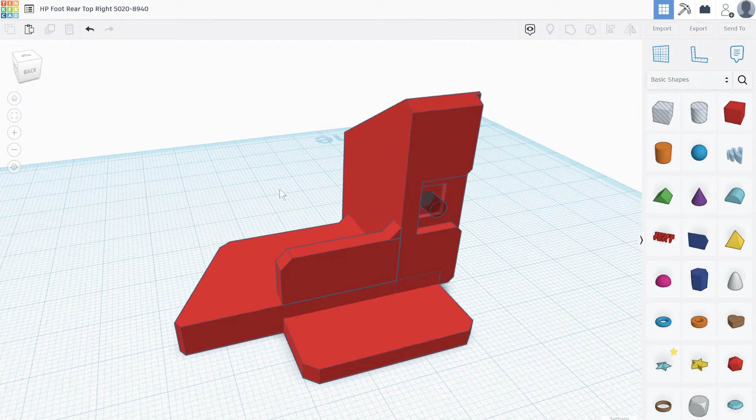We were adding some chamfers, kind of dressing some things up. There's a few more holes. Well, we have to add all the holes and offset still.

Let's see here. We can't change the screw size because that goes into an existing hole. That's fine. And the threaded hole, I need to leave room for adding threads, because the other side might already exist and you may want to use that to thread it in. But if you don't, that's okay.

It looks like there's a pin in here. So what I'm looking at here is this screw holds it onto the piece of equipment. That one has to be the same size because the thing it's screwing into is the same.

This is a threaded hole because the top piece - this thing, let's see if I get the right side - when these two go together, this can screw in. So that's a fixed thing, and I need to make the hole so that those threads can cut their own thread in there.

But this is all you really need, because this is just to keep it from sliding past each other. It doesn't have to be screwed together. That's just a convenience. So I think this will work just fine.

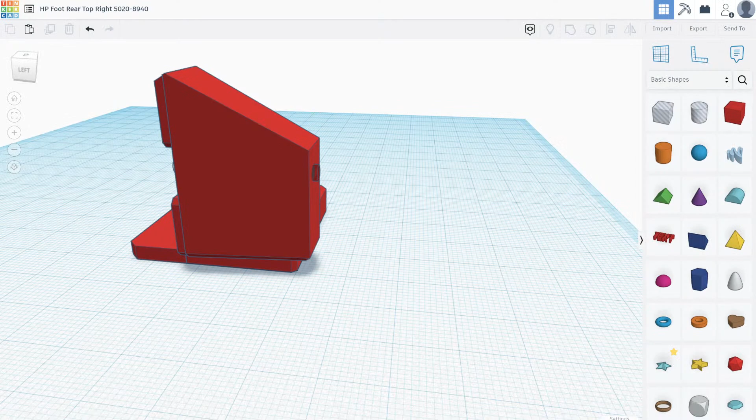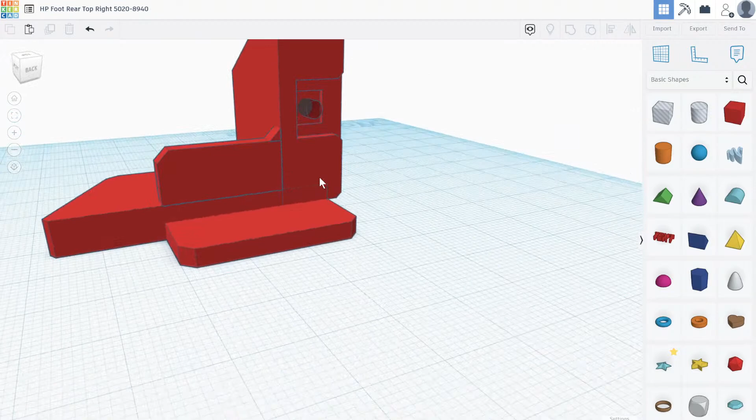Where did we leave off at? There's a couple more decorative chamfers that aren't important because they're small, and the printer will smooth that out. Overall, it looks like we're in good shape.

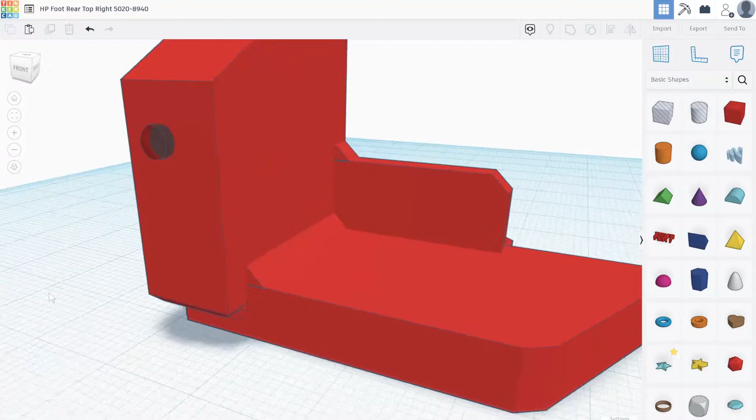This hole needs to go in there. I need to actually put that hole there. Otherwise, does that look the same? How about there's something? Oh.

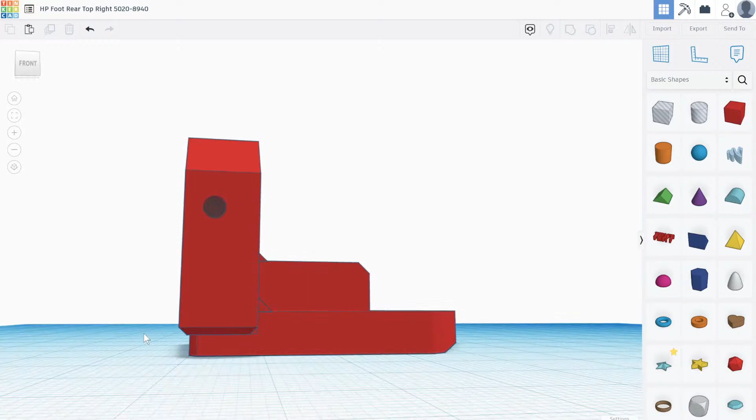That's interesting - 13. No, why is that interesting? That's 10. Why does that look like it's offset more than it should be? I don't know. Anyways, we also have to put a recess here for the screw to go in.

And that hole is centered there. It's about 7, but let's check my screwdriver. So the screwdriver I tend to use is this one, and it's a fairly common size. And it needs 6.5, about 7.

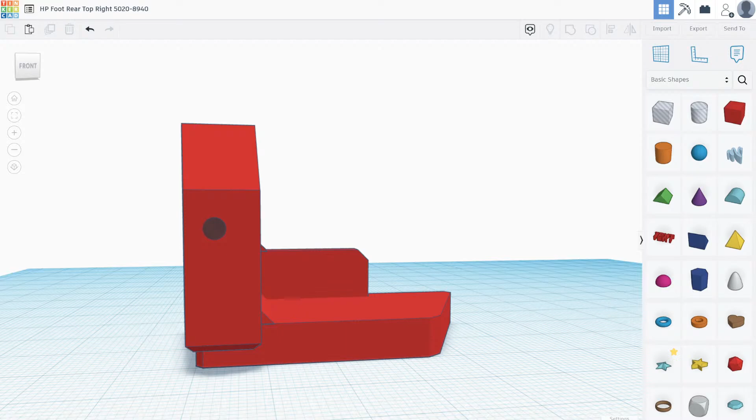So it would definitely fit in a 7, but just barely. If I can get an 8 in there, I will. So let's try with an 8 first and see what happens.

Down - that's looking a bit chunky. Center it up, there we go. Yeah, that would just blow out that edge. At least right there it would.

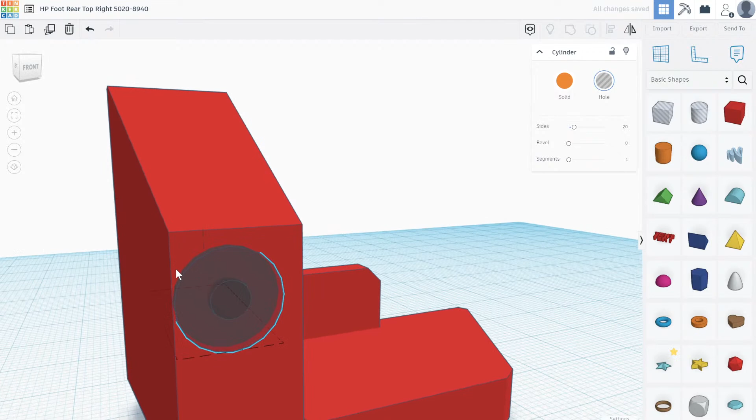So, 7.5 at best. That doesn't look quite right. Yeah, that's centered. I think it's just the angle I'm looking at.

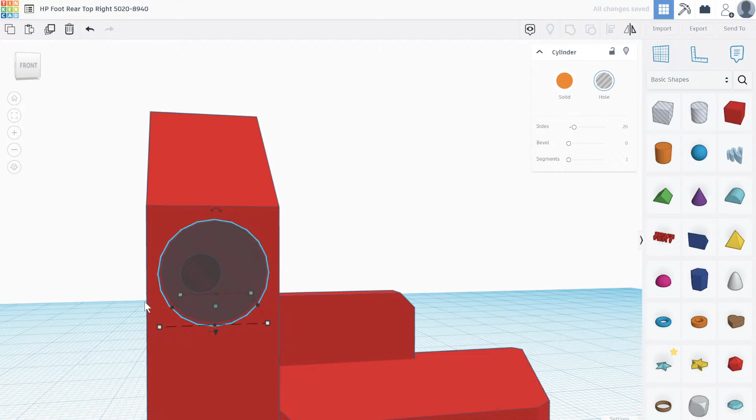What is going on? Ah. Nope. That's centered. Okay, let's shrink this to 7, I guess.

Using the same trick from last time, taking half off each side. I need to make this...

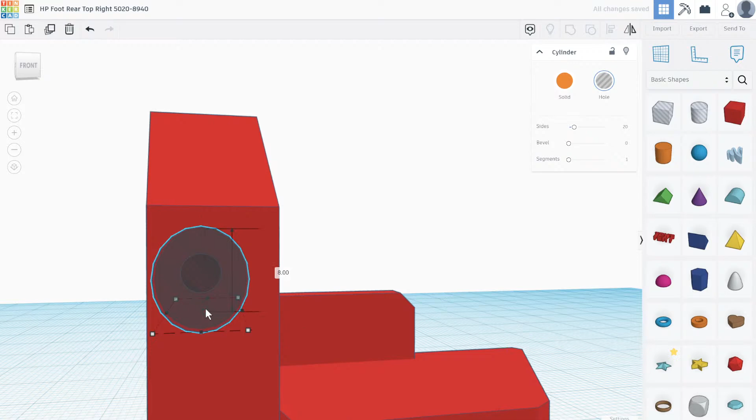Alright, let's make this transparent for a minute to see how deep we're going to go. How deep will we go?

The existing one is a little more than 15. What would we say this was - an M3? Yeah, it seems to be an M3.

Let's see what M3s have got and figure out how deep we need to make that. That is not an M3. Maybe. Yeah, I take it back - that's an M3. But wow, it's really deep too.

That might not be, because this is a US thing. That may not be an M3. It fits really good, but that may be an M3.5 or American size. Yeah, it's not an M3. It's sort of matched. Okay.

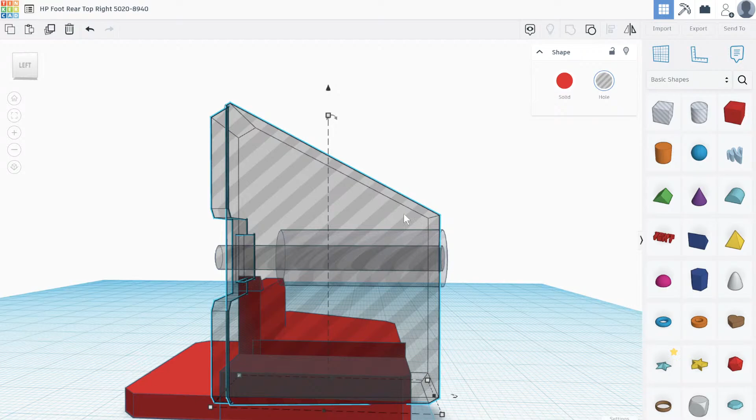Outside diameter needs to be closer to 3.5. Size is 6. It needs to go 8 in, so from the very, very back here, it needs to be 8mm in.

So first, let's bring it all the way to the back edge, and that is 27. It needs to be, because I have one extra one, so it's really 26. Let's put that right there. So that's 26. Now we need 8.

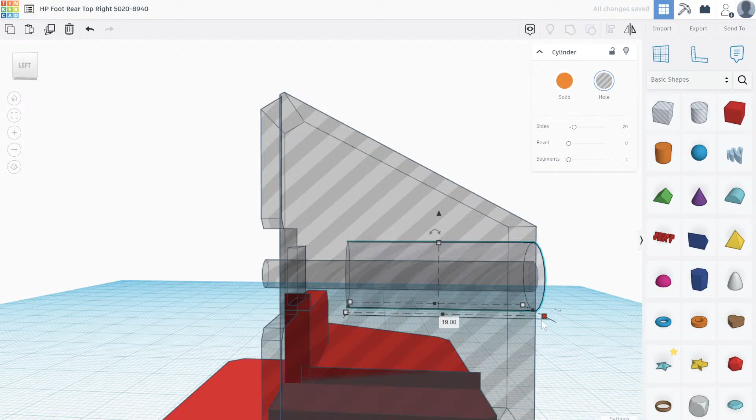So let's take that to 18. And pull that back out one more so we can grab it. Okay, that should do that. That looks decent on that side.

Problem is that this is 3 millimeters. Oops, this. Okay, let's do this again. The problem is that's too short. Okay, there, that is 3 millimeters in diameter. But my screw is 3.5, and that's a problem. That's 3.4.

About 2/10, no, not 2/10, 3.4. Yeah, about 2/10 spacing would be the margin of error in a hole like this for an FDM printer. So I need it to move freely as well, so I put another 2/10 on top of that, which will be just under 4, that's an extra 0.4 millimeter, sorry. And we need it to be 3.4, so it really needs to be 3.8 millimeters.

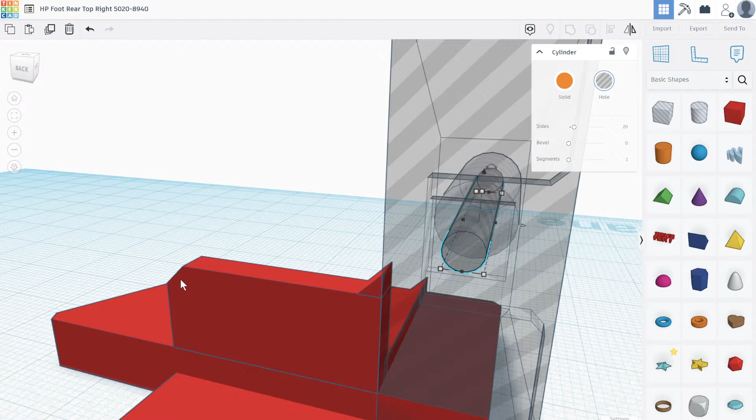And actually we could do that. It's probably cutting it a little close for an FDM printer, but 4 millimeters isn't really that bad. Let's just do 4, it's not going to make any difference. The screw will still fit, even if it's the right size screw, and it's okay if it's a little sloppy. So let's make this 3.5. We're going to add it half to each side.

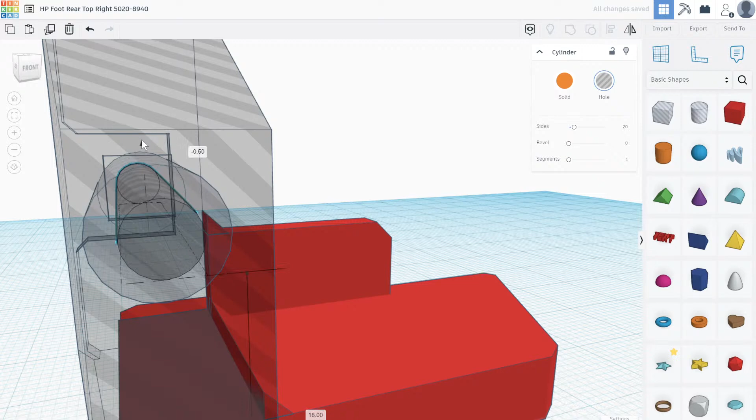Let's make this 4 and drop it down to half. There we go, that's back in the middle. So we've got our through hole, we've got our countersink, and we've got all those. Let's put this back to solid.

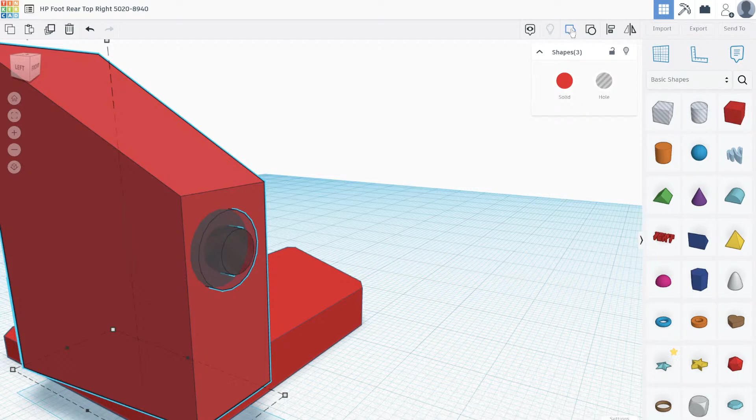Subtract these out. Oops. First this one and this one. Hello hole, there we go. That should take care of that.

Looks good, looks good. Something still, I mean, it's not wrong, but it just looks weird. Like it's not in quite the right place. I don't know what it is. But let me double check a few things because it's worrisome.

7 millimeters from the edge. It's slightly off center at the top, but not that much. Yeah, see, that's 10 before the chamfers. Is this 10? Let's double check.

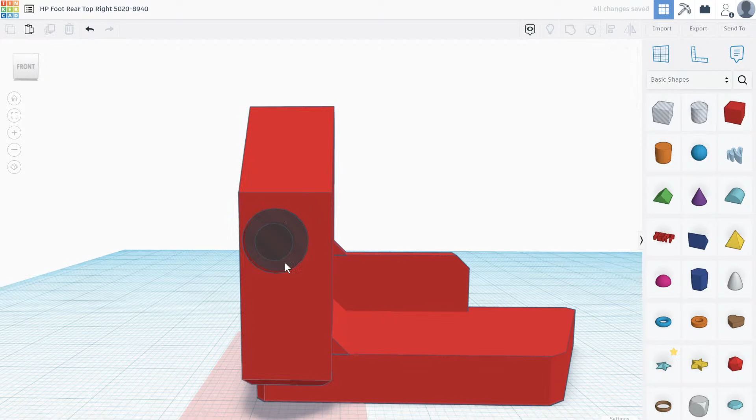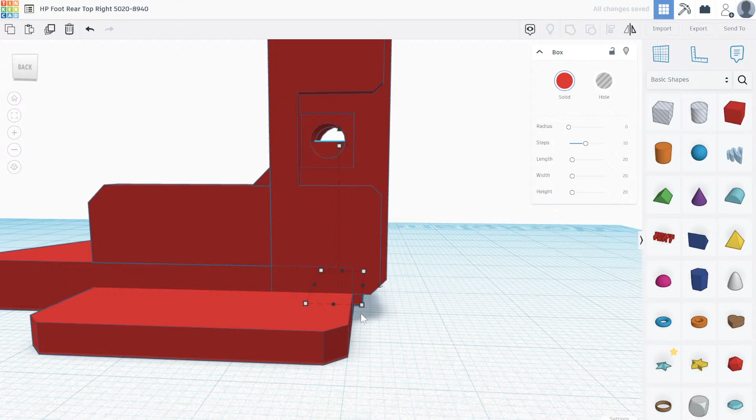Can't check that way, let's use the measuring block. Doink. How big are you? You're 10, exactly. Well, let's make it 7, because that's where the center needs to be. Did I do something dumb? Probably, pretty good at that. And boop, okay, that is.

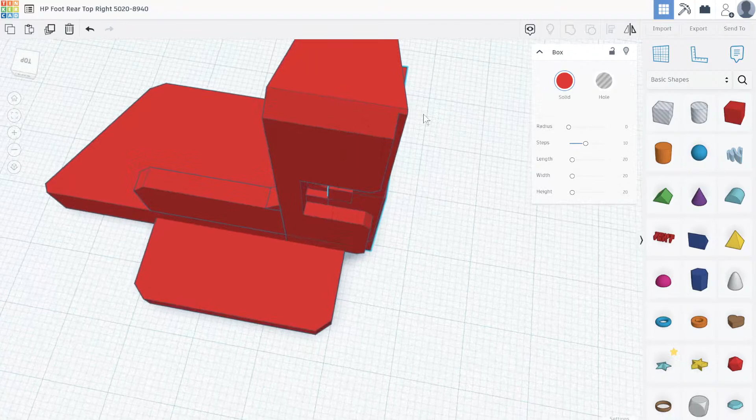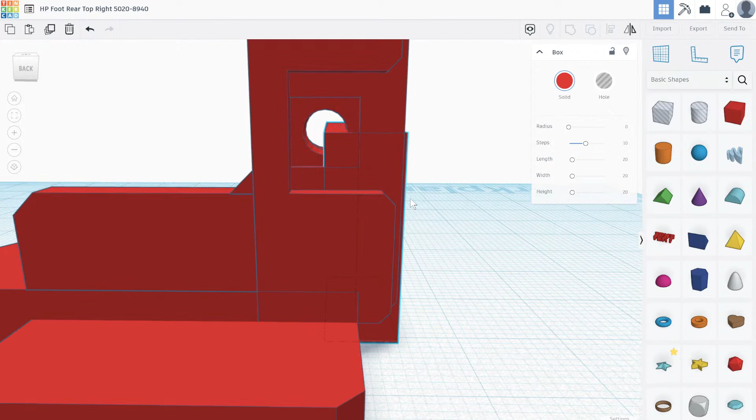That is something. Why is that not... why is that not 10? That's exactly 7. Why is that? Why is that there?

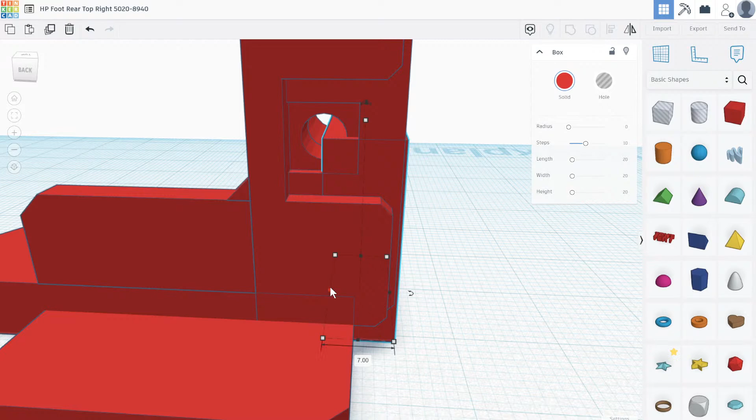That is 13, right where it's supposed to be. Well, let's measure in from this side to see if that's any different. From that side, it should be 6. Is there a bevel on this side that I'm not accounting for?

Maybe. Ooh, is there? Let's get the square out. No. Well, maybe the tiniest amount. It's hard to measure with it being so small. No, there's no bevel on that side.

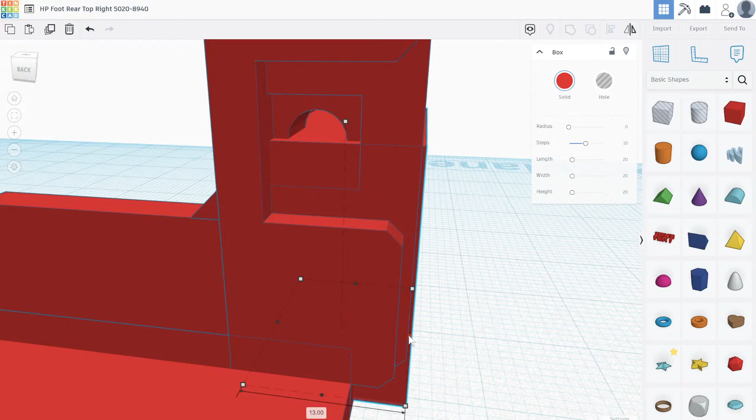And so that pretty much has to be 6 to be right in the middle. Now, that's 6, that's 13, that's 7. It's 1 millimeter off. So what is it about that hole that looks so weird?

Is it just because it's half a millimeter off? Is it because that's rounded, maybe? Let's look from the outside edge. That inner hole is 7.5, and it is 1.8 from the edge.

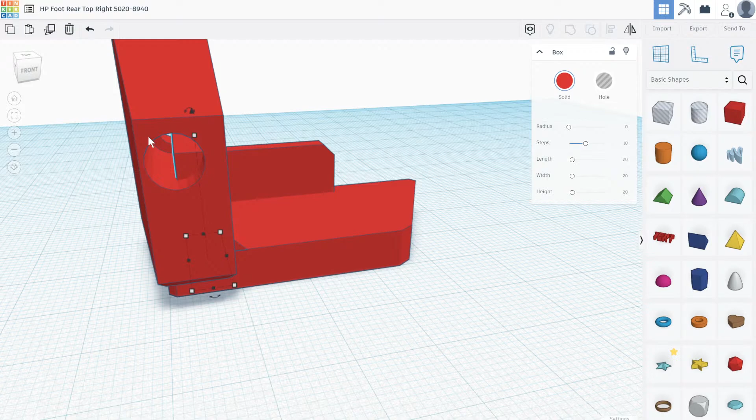Let's look again. Okay, because that is a 7 millimeter hole instead of - I got a 7.5 millimeter hole, and I've got an 8 millimeter hole. A 7.5 is 1.8 millimeters to the edge. Split the difference, 0.25, 1.8 minus 0.25 equals 1.5.

And that's why it looks weird, because that should only be 1.5 millimeters, and it is more like, well, yeah, at least 2.5. That's 1 millimeter off.

There's no way that that goes crooked into there. Well, let's measure to the center of both sides off of this flat edge. Let's see what we get.

That hole is centered really close to, wow, a little more than 5 from that side. On the back where the screw comes out, no way, that can't be at an angle. Would they do that? I mean, they kind of have to, maybe?

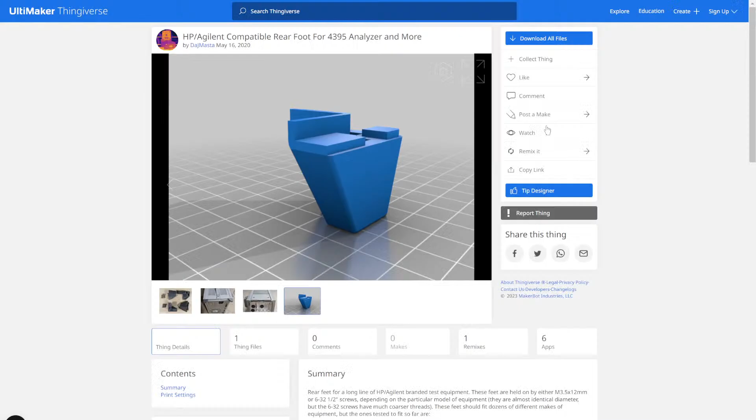Is that hole crooked too? I can't look inside, unfortunately, but I can't get the angles just right. But it appears that it is. Possibly. Yeah, maybe.

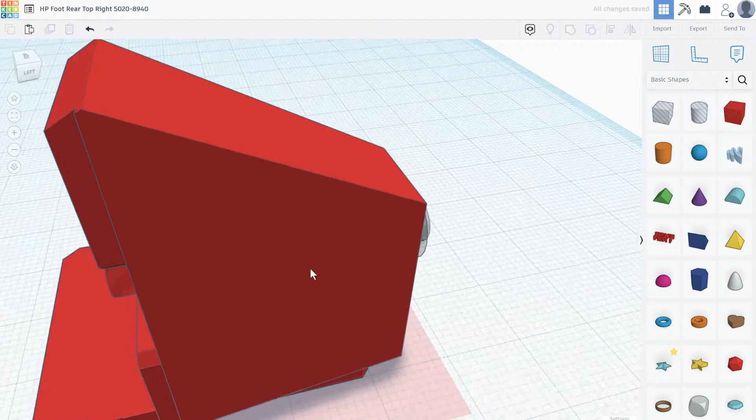All right, well, now we know. That's not so bad, though. It's a little bad because I can't pivot from a single point back here. But I don't really need to, do I? Let me see.

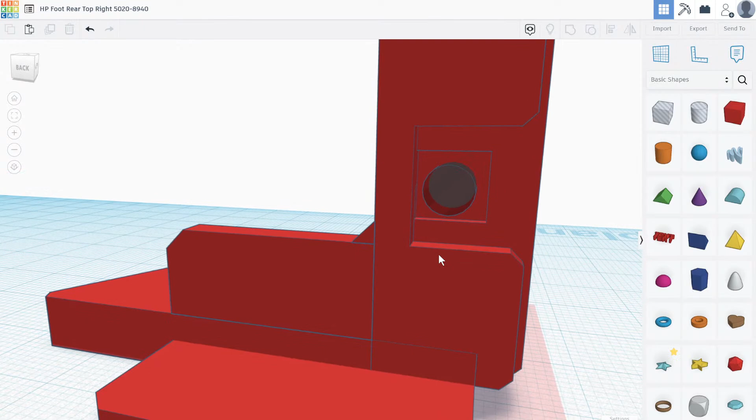I made that hole a little bigger, and my target is to put it right in the center of that box, so I got a little wiggle room. Here I'm gonna do it by hand. Let's see, we'll do a couple degrees to bring it on center.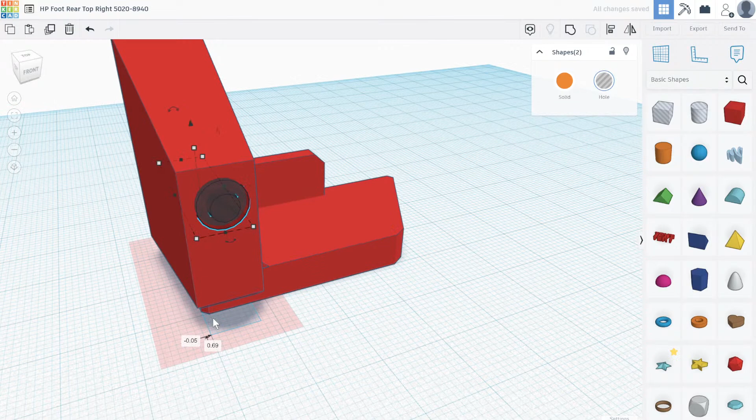Maybe too far. Yeah, that's what I suspected. Just put it back about half that, and then we will slide it over. Maybe not that much. Let's put it at -0.2 just to see how far.

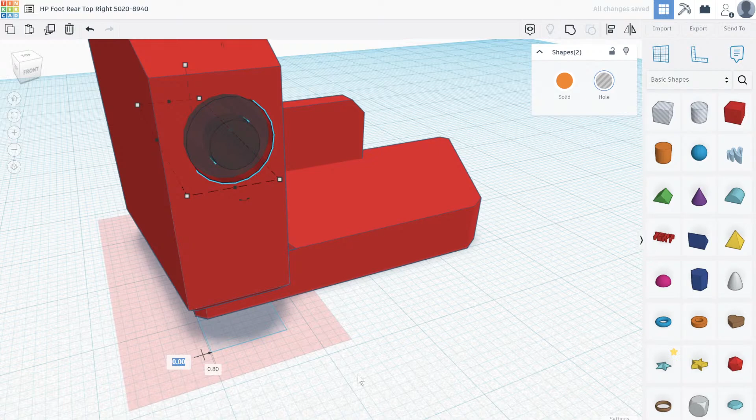Nope, that's not the right one. 0.8. Wow, my number fingers not doing great. Well, that's kind of centered. What's this side look like? No.

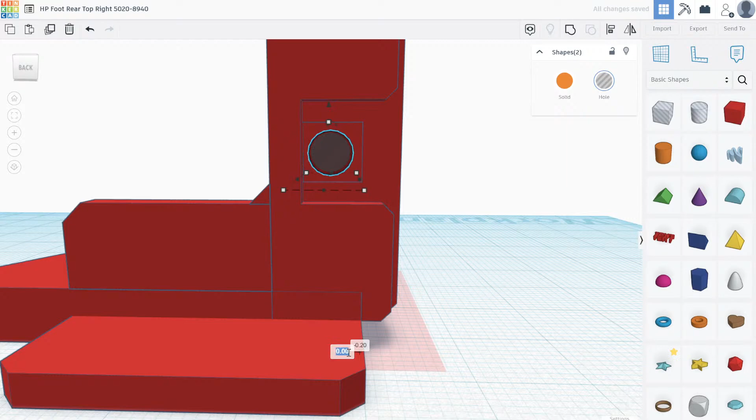-0.1. Yeah. -0.1. -0.2. -0.3. Looks good to me. All right, let's look at the other side. Centered-ish. Okay, that was only like 2 or 3 degrees, but I think that's enough to make that.

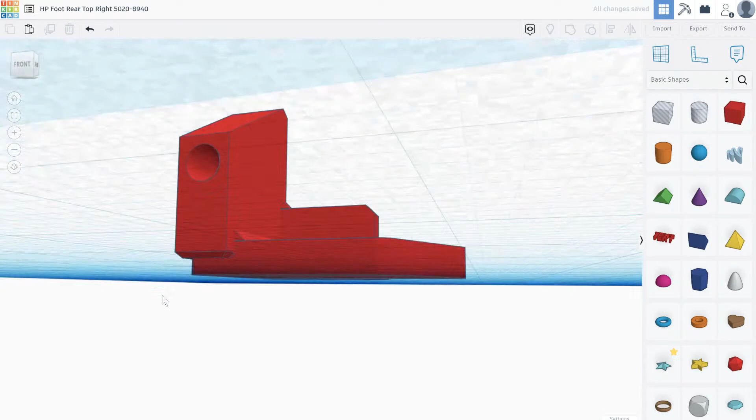Let's get rid of our measurement block now. All right, I'm good with that. Let's get the last couple of features on the bottom here.

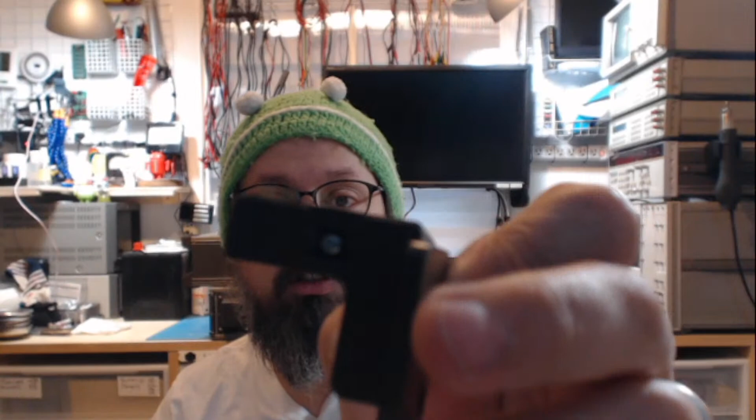So the next part is, we just finished that. The next part's here. I see the problem, my light's off. We need this little hole. Well, we need the threaded hole, and then we need that recessed hole right there. And then we should be able to finish. Okay.

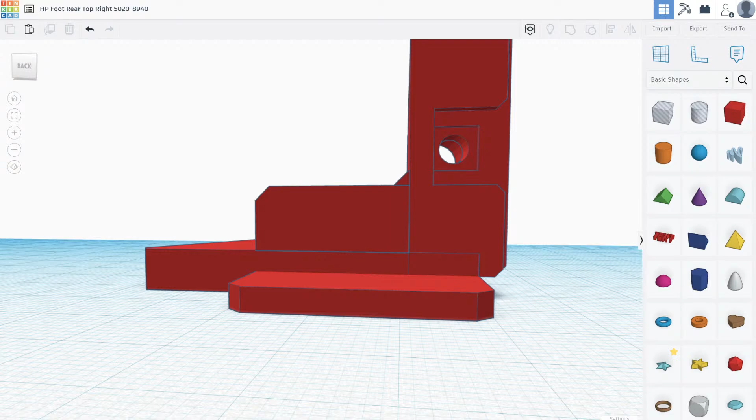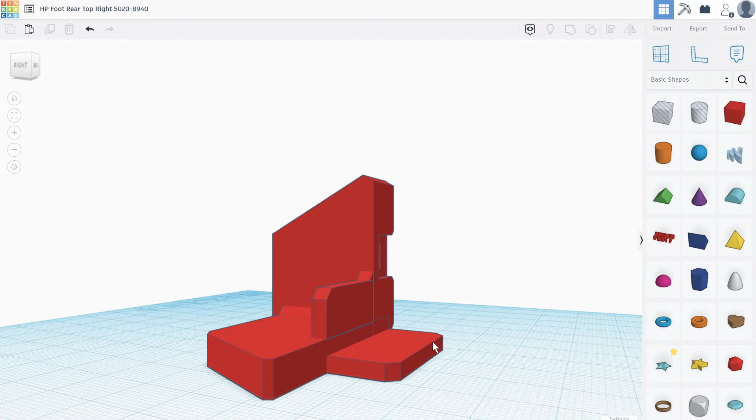And that's kind of important where it is located. Where's the important surface? The important surface is this one, because this is where the corner of the piece of equipment it sits in here, and that's where it screws into. This is the mating surface for the other device that would attach to this. So

we should measure it. The hole here needs to be measured from this surface to the center of this hole, or at least the edge of that hole. Let's look. That hole is 7.5 wide. We can make that 8, I'm sure, without any issues. The pin on the other side is 7.4.

Yeah, let's make it 8. And that needs to be from that surface. I can extend that to here. Looks like it's about 8.5 to the center.

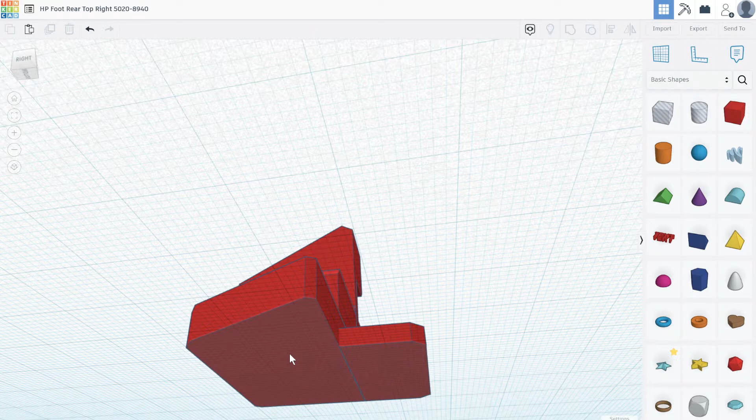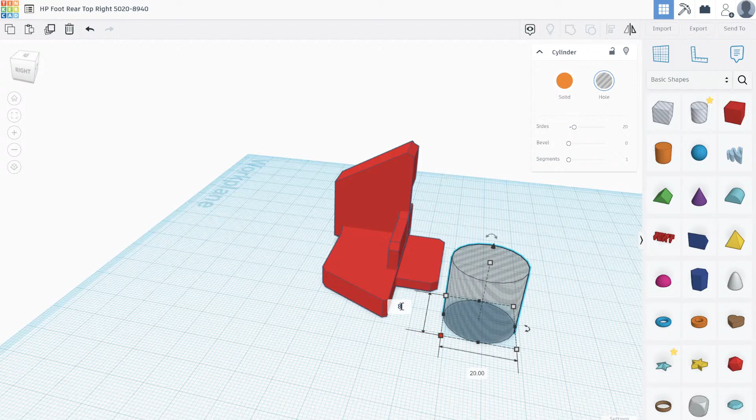Nope, it's 7. Okay, 7 millimeters in to the center, 8 millimeter circle. Yep. Where did that go? Three millimeters deep. There we go.

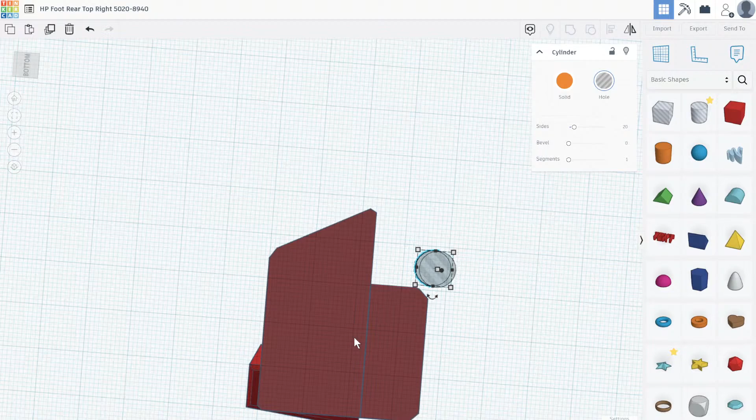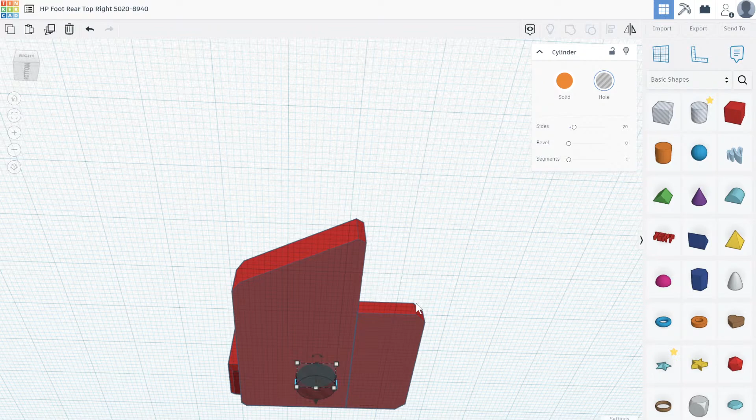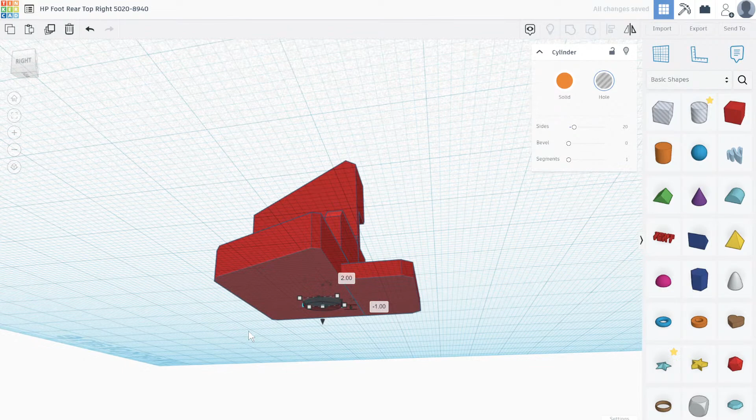And now it's the other way is 15 millimeters from the back edge. Okay. Right there. And yeah, it looks right.

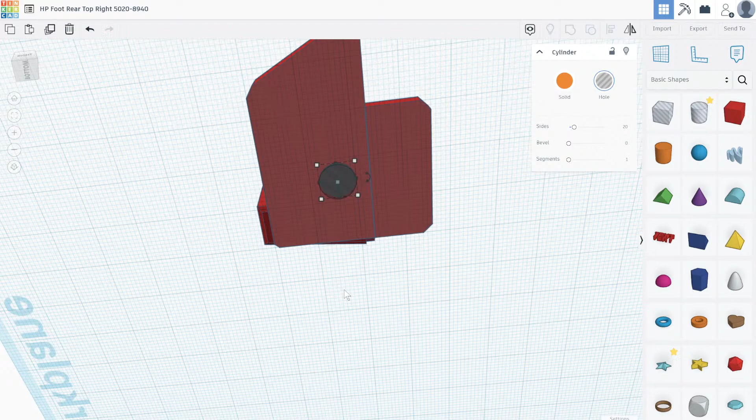Now let's put the threaded hole. This thread is maybe an M5, but that outer dimension is 5. The inner looks like about 4, so let's make a 4mm hole.

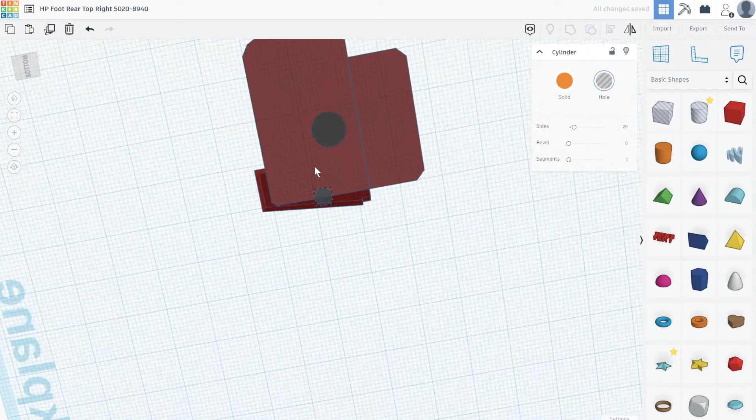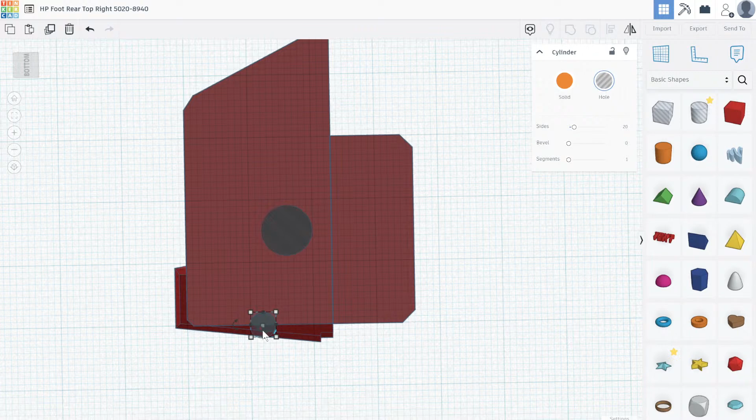Just move that down 1. Right. Now we need to, how far up is that from our reference edge? 30mm up. Let's move it up 30.

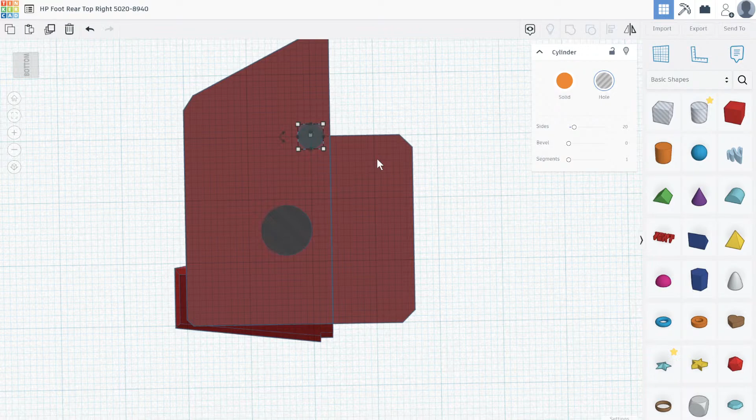Is that a line? Yes, it is. That's actually a nice correlation. Okay. From the edge, our other reference edge, it is 14. 1, 2, 3, 4, 5, 12, 13, 14. There we go.

It's very tall, but that's okay. And I think that's it. Let's pick everything and put it all together.

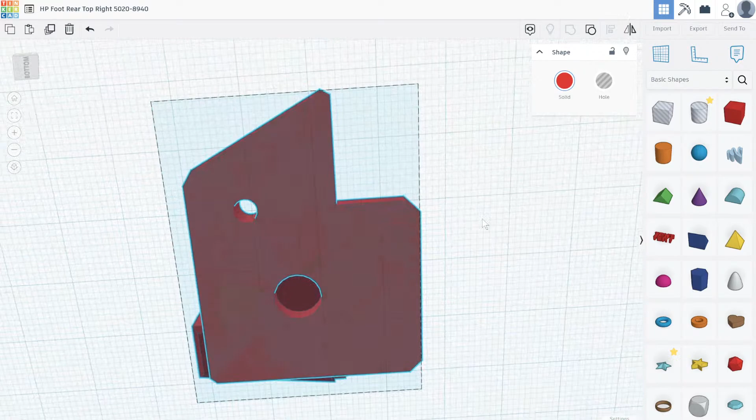So great, yes it does. That side looks good. That side looks correct. That side looks right. Yep, all right, there we go. That is one piece done.

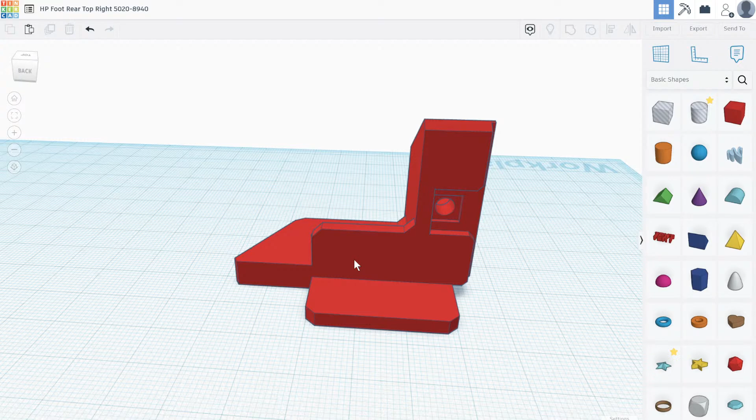Let's see if the other side is just a mirror, because that would make that nice and easy. Probably it's just a mirror. Yep. Yeah, okay, let's copy this piece and start a new one. Oops, that was just copy.

HP foot. But this one will be the other side, which is 50208938. Top left and mirror left. Three, 8, 3, 8. There we go.

Yep. There we go, 2 done. Now the other one is almost exactly the same, but in place of this hole we have a pin, and in place of this hole we have, well, this is a captured screw, but we can not do, I mean we could sort of, but I'm not going to.

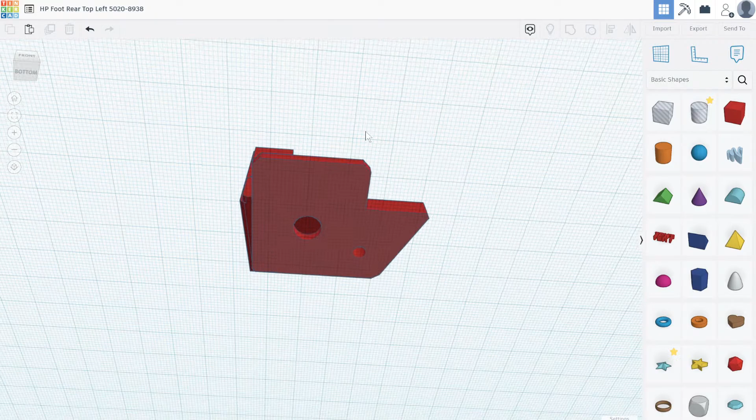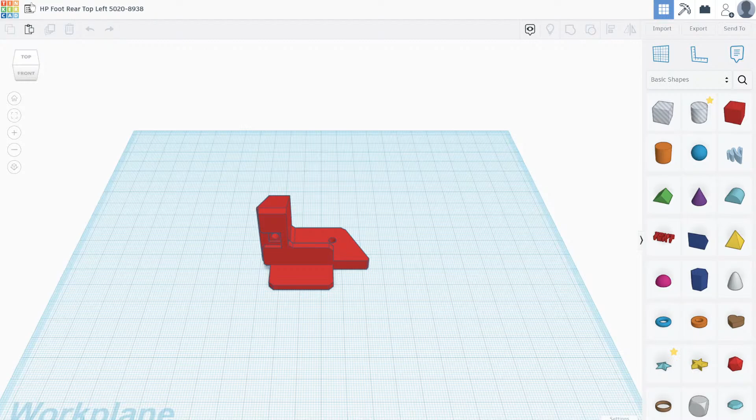We're gonna use a different screw and just screw them together if we want to. Okay, so yeah. Let's make another. New design.

And if we start from that piece, is that right? Let's copy this. Yep, it's that one. But this will be the bottom right. Part number is 50208937.

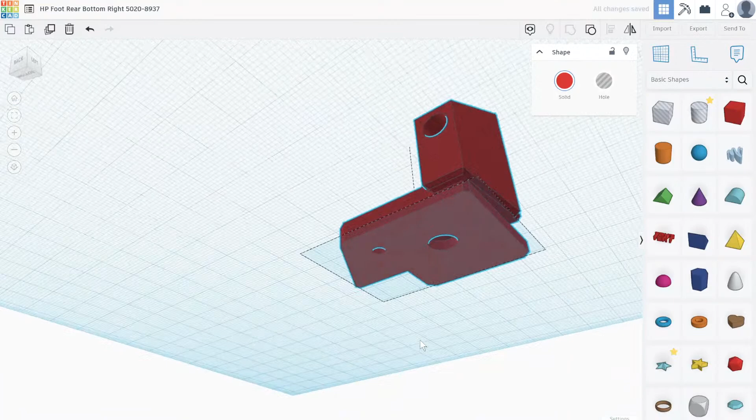Let's copy this, paste it here. Let's start with the easy part, the pin. We will take this, and it needs to be probably less than 2, because that was a 3mm hole. Was it 3? No, 2.

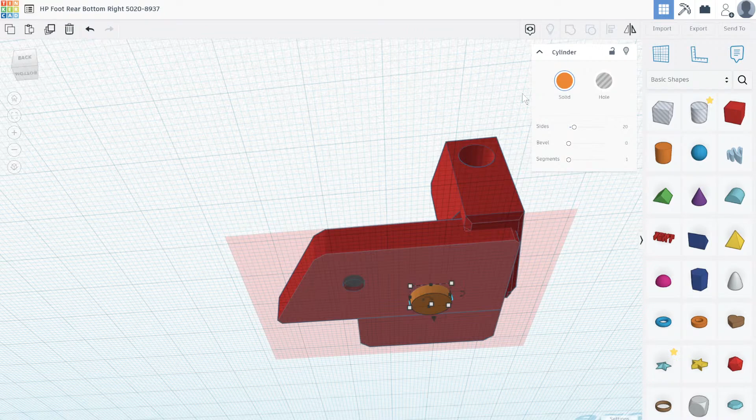Make it solid. Bring it down, make it 2. We need to keep it in the same place, but make it a 7mm pin, which means, hang on just a second. Right now it's an 8. We need to take half off each side, so we'll make that 7.5 and 7.5 and 7 and 7.

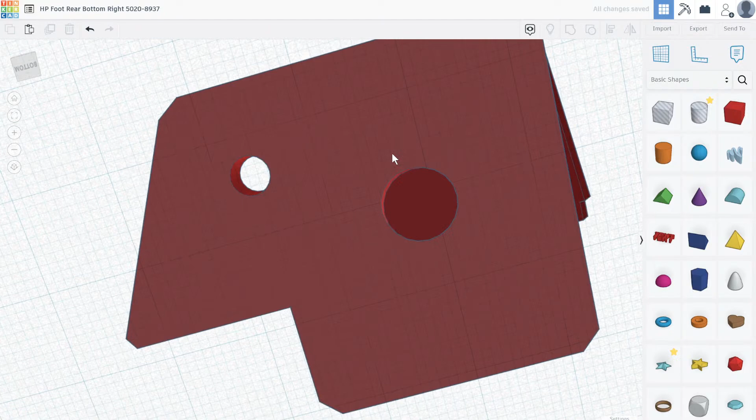So now it's in the same place, and it's a pin because we made it solid and moved it around a little bit. Now this hole, if we want to use the same size screw, which would be nice, this uses a very long, I don't know, is that an M5? Probably M5-ish, I'm sure it's not M5 because it's Imperial, but

I don't have any M5 jack screws, but I can just use pretty much any screw I got. Fine thread. Woo, that's not an M5. Is that an M6? Yeah. My M5 box has M6 in it.

My M6 is a finer, my M5 is just a fine thread is all. Okay, I think what I'm going to do, because it's a matching piece, it needs to be that same screw. Yeah. Okay. Well, that's fun. I'm sure I've got it somewhere, but not inside. My machine screws are outside. Let's just pretend like I will have that screw. The hole goes all the way through, so it doesn't really matter, honestly. I could just make a 5mm hole and call it good. And I think that's what I will do.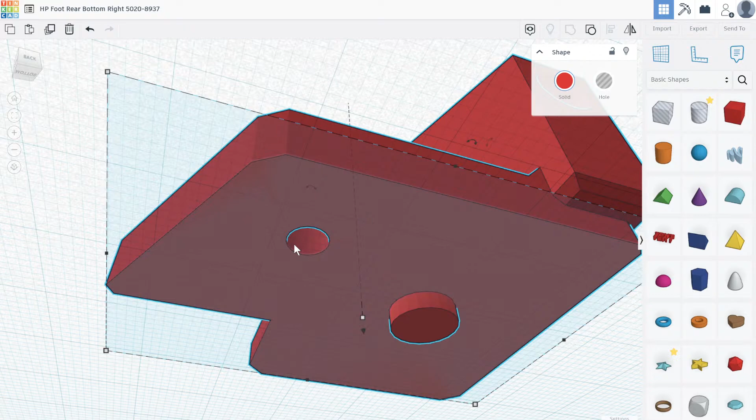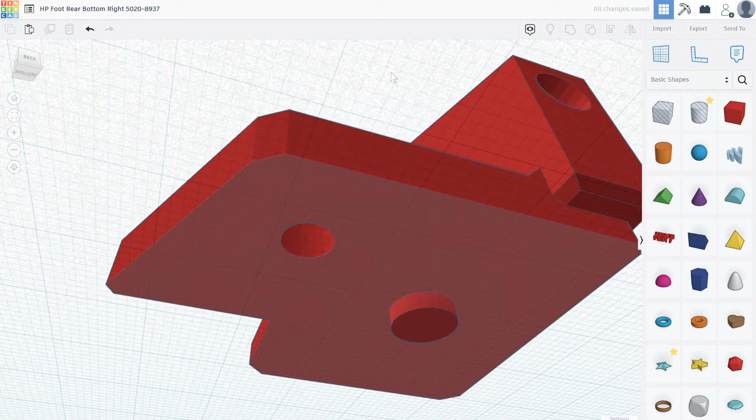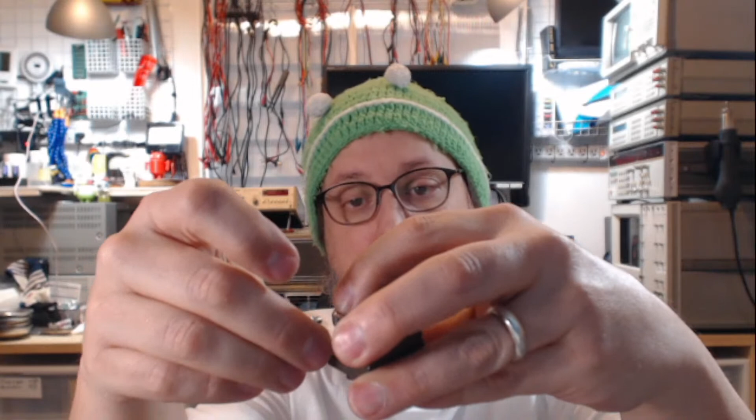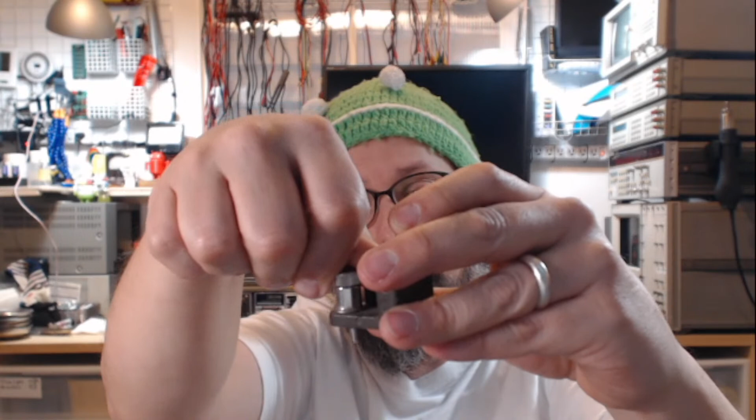Same deal. We just changed this hole from 4 to 5. And done. Done. There we go. That is it. I mean, the real thing has this jack screw on a spring that's captured and can wiggle around and do all kinds of things, but I think we're just going to use possibly a bigger screw. It could be this one because the other ones have it. I don't need it to match exactly, so I could replace it with a metric one, since all of these could be metric if we wanted them to, I suppose. Or if I have this one on the other device, we'll just use that.

So anyways, good. Let's copy this one, create a new, oh no, I didn't mean to do that. Well, I guess that's fine too. Let's create a new one. Paste it on there, mirror it. If that last one was top left, bottom right, this is the bottom left then. Rear, bottom left. And that's this one. 50208939. Yup.

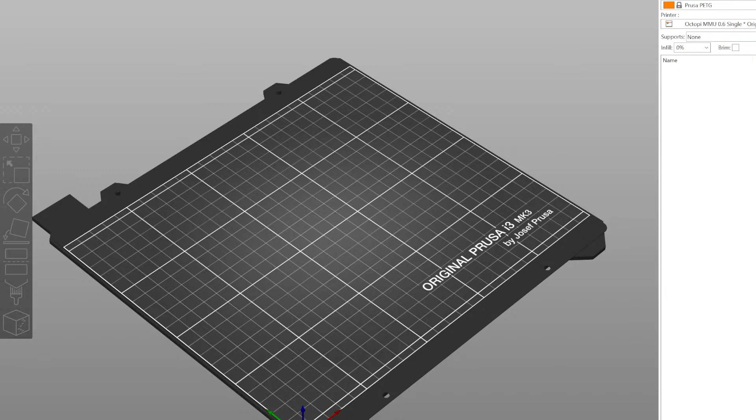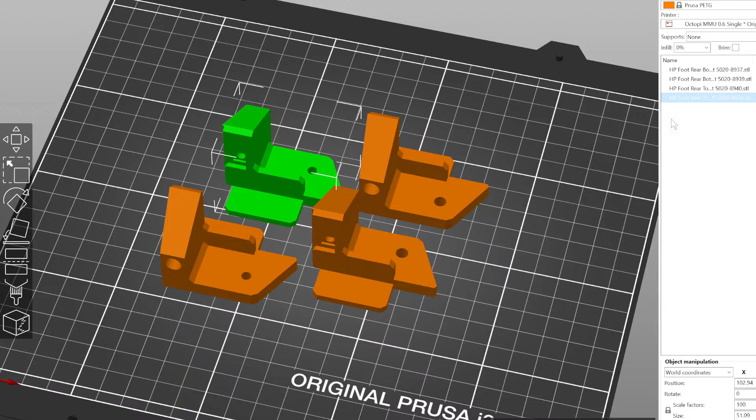Oh, it's almost time to go. One last thing to do is load them up into the slicer for the printer. I use Prusa slicer. Let me switch to this view. There's my Prusa slicer. Let me grab the files and dump them in there. There they are. Lay them out. Of course, they all seem to have some face problems somewhere. Something overlapped in a weird way, probably. But fix those.

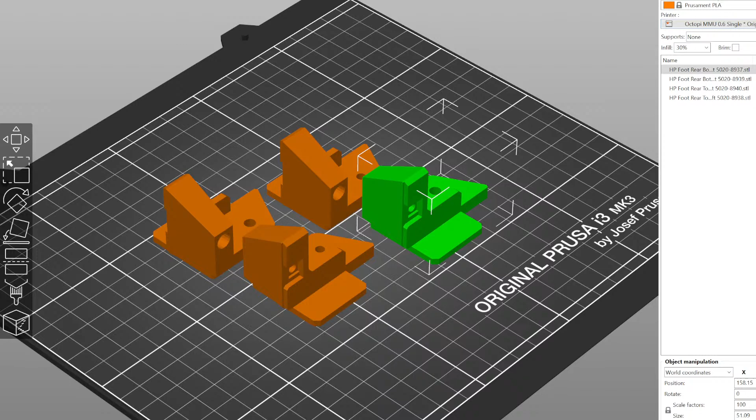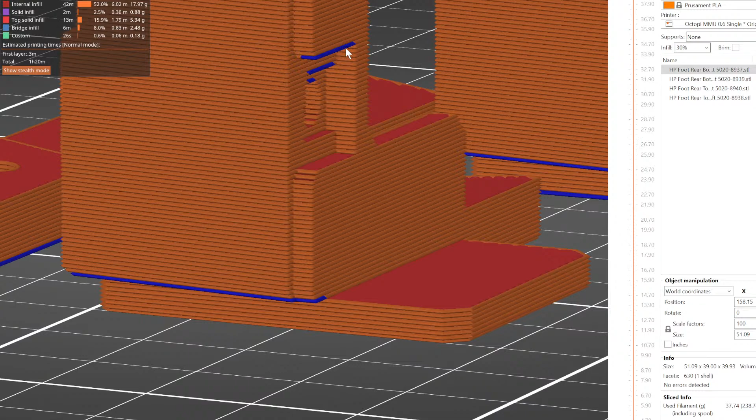Yeah, I would probably use PETG, except I am out of PETG. So let's switch to Prusament PLA. Only this part needs to be strong. The rest of it, I don't think it needs to be, so let's just stick with the pretty normal 30% infill. I am doing pretty rough layer heights, 0.4, because I don't need it to be anything stronger than that. The only overhangs would be right here, and it can easily deal with that. These are only a little bit of stick out, so it's going to look a little lumpy. Possibly this one might droop a bit, but it's going to be fine.

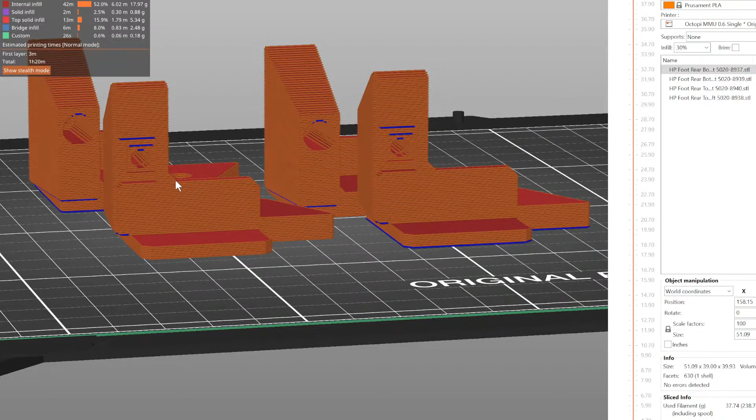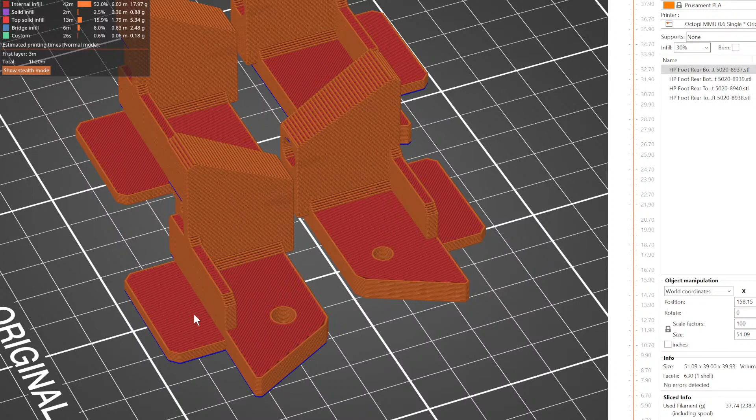I could bevel that on like a 45-degree angle, and that way I wouldn't have any problems, but it's so small that I don't think it's going to be an issue. I'll print them, and if it is an issue, we'll take it back. Oh, I just realized that this surface to this surface is the important one. I wonder if that's going to be an issue. Probably doesn't matter. Hour and 20 minutes. No, because that's the other side. So this face is the important one. That thickness doesn't matter. This screw height to this, we made sure that was right. That's important. This is a little thicker. Should be fine. All right. Well, that's it.

The last thing for me to do is throw it on the 3D printer, and maybe the next stream I will share that, and we'll see how it goes.

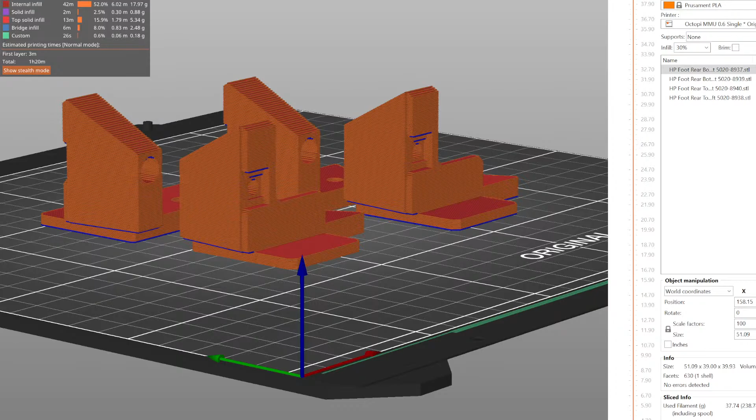So again, I know long stream. We did almost 2 hours of modeling here for relatively simple parts.